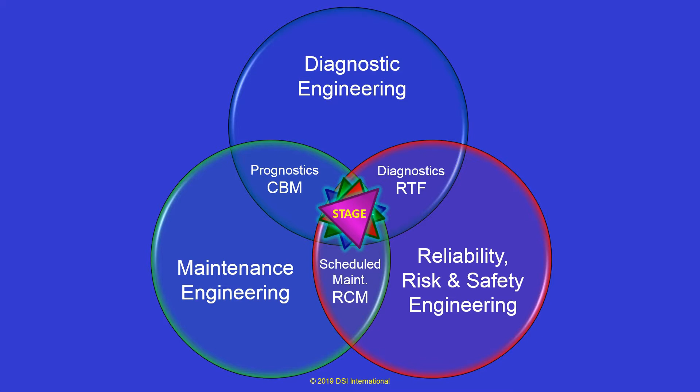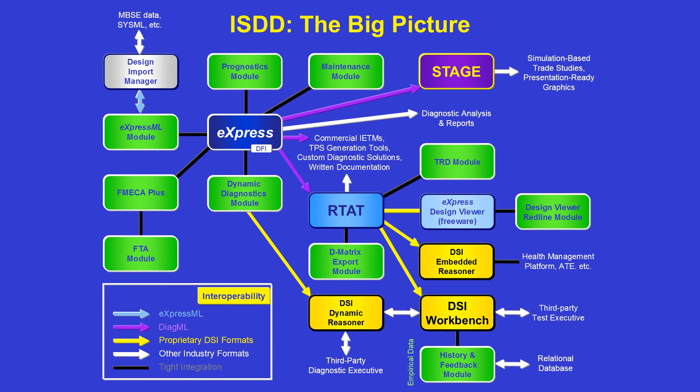At the core of the model-based diagnostics engineering is eXpress, which is not only interoperable within DSI's ISDD model-based tools, but also with data from any capable third-party reliability or MBSE tools. The eXpressML data import to eXpress is used to capture functional data structures from industry MBSE tools, but also avails an XML output for reuse in other high-end aspects of the MBSE environment as well.

MBSE tools do not typically contain comprehensive failure data or diagnostic information, as is essential when attempting to optimize and influence design decision-making. Contrarily, by leveraging eXpress, significantly more integral data is immediately integrated within a dynamic product lifecycle management, or PLM paradigm. In ensuring the integrity of the MBSA, the diagnostic interdependencies shall provide the means to cross-validate any interdisciplinary design assessment products. With this knowledge base, the test coverage for any BIT can be validated.

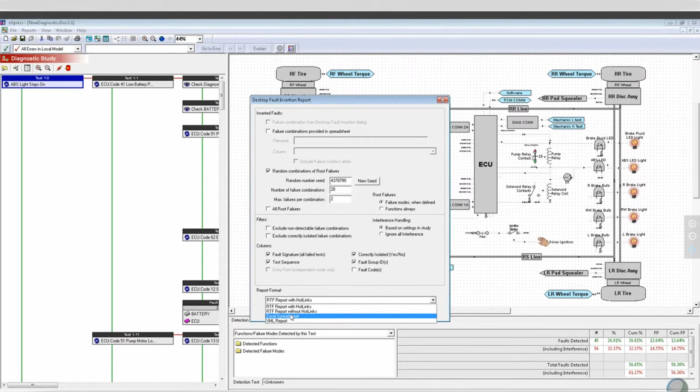In eXpress, one way to validate your diagnostics is to run the fault insertion report, which can show how the diagnostics isolates random combinations of failures. Let's do 20 combinations of up to 2 failures at a time. We'll include the fault signature and test sequence for each failure combination and generate the report to a spreadsheet. For each failure combination, the report lists the test that would fail and the test used by the diagnostics.

The auto-generation of testability assessments is a core competency of eXpress by delivering a rich and unmatched set of documentation in support of any complex design. eXpress is able to auto-generate preliminary failure modes and failure effects for any design. When more specific data is available, it is imported or merged into the model and fully propagated throughout the design.

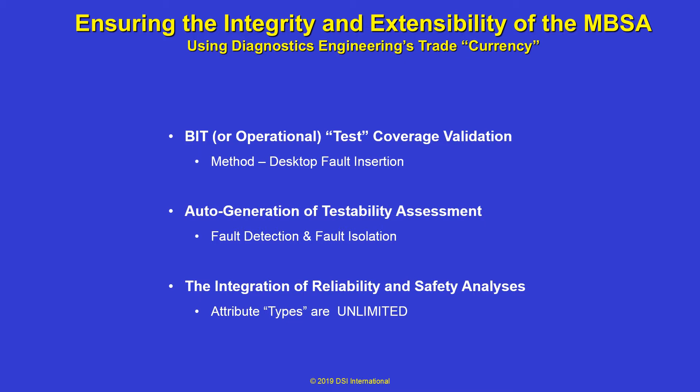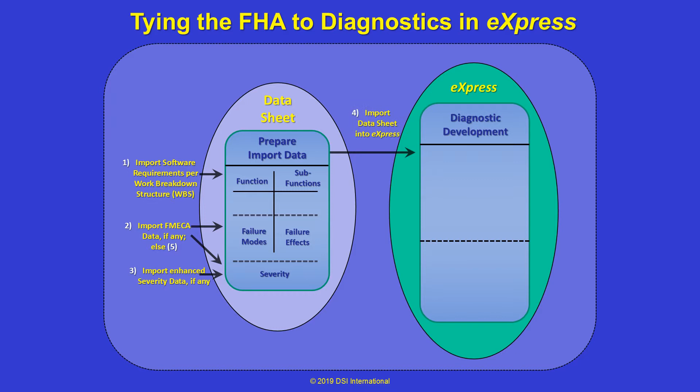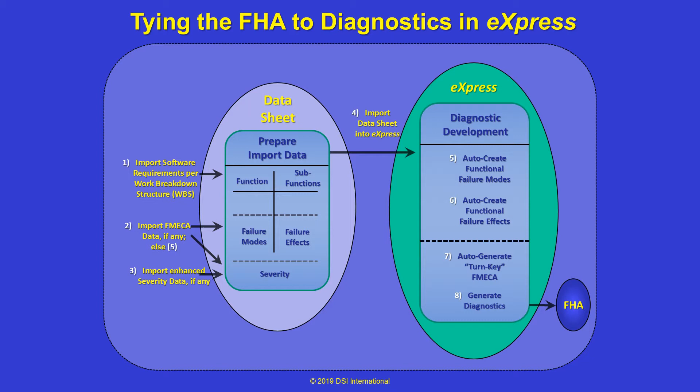Since eXpress inherently propagates root failure modes, failure effects, and relevant component property attributes throughout the entire design hierarchy, the preliminary functional hazard analysis can be auto-generated as an output product and/or described in a form that is traceable and mapped to the WBS. eXpress is able to automatically generate the traditional, standard FMEA or FMECAs while allowing full customization.

Additionally, eXpress enables the FMECA to describe such diagnostic details about each component as failure detected, number of root failure modes in each fault group, and the size and constituency of that fault group. It can also describe if the failure is uniquely isolated, being identified as FUI, which is key to considering any root failure causes. Not fully discovering the impact of FUI will have a negative impact on the operational value realized from any MBSA.

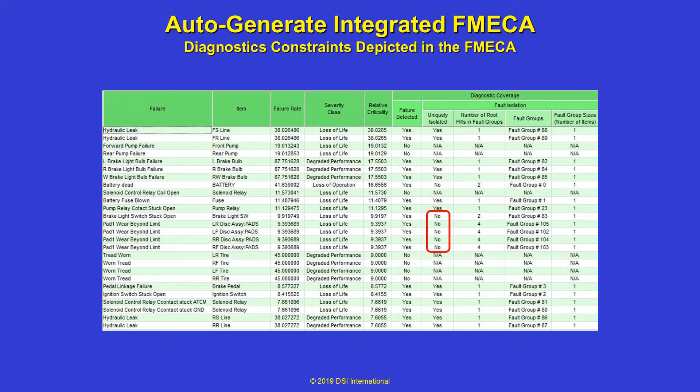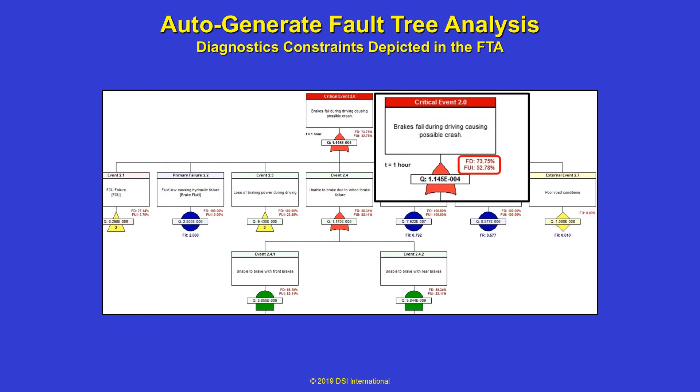The Express Fault Tree Analysis, FTA, is produced as an output from the captured diagnostic design in Express. Unique to the Express FTA, it will identify the probabilities of detecting a failure at any node of the FTA and the percentage of that failure that can be uniquely isolated, or FUI. This is key to identifying the root cause to a specific failure mode at any node in the FTA, integral to a high-end MBSA process. The inability to discern the specific root cause is a heavy contributor to false alarms and operational aborts.

The simultaneous auto-generation of Express Diagnostics informed FMECA and the interdependent Express FTA can be performed at any point during design development. Concurrently, automated cut set reports for any FMECA FTA generated in Express can also be reflective in a failure mitigation report to discover unmitigated single-point failures.

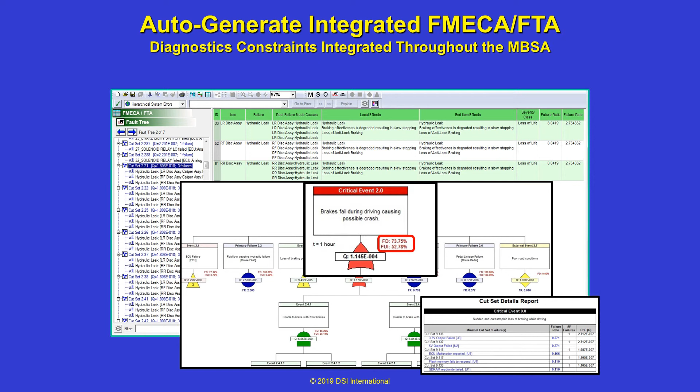As these companion assessment products are generated as codependent outputs from any model within Express, any variation, change, or update to the Express model during the development process can be immediately integrated with the corresponding MBSA and included in ensuing trade study analyses.

To discover the strengths and weaknesses of the MBSA as it corresponds to the operational environment, the data can be exported to an operational support simulation whereby any failures can be simulated during any mode or operational state of the operational asset. The simulation of failures will determine if the critical failure is detectable or isolated as declared in the FMECA or FTA, but at the operational systems level.

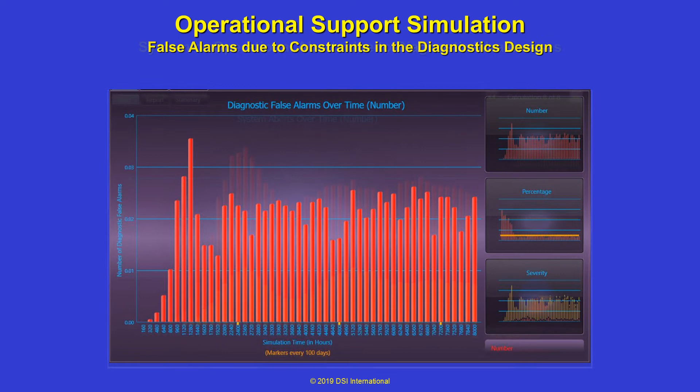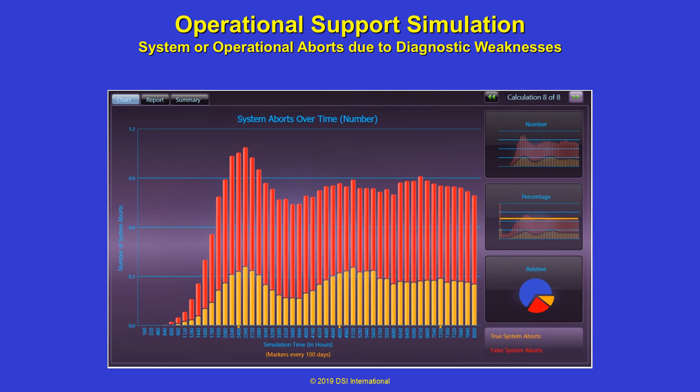The STAGE operational support simulation will determine the impact of the occurrence of any failures during any specified sustainment lifetime. Unique to this simulation is that it allows the assessing of any mixture of maintenance paradigms, such as run to failure, preventative, condition-based, and predictive, to analyze operational trades, benefits, and costs in over 100 graphs.

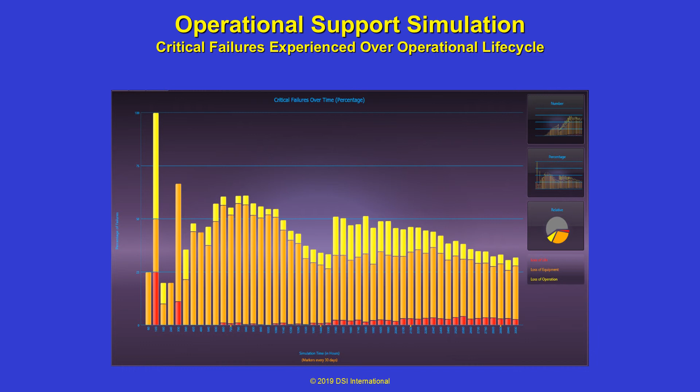The STAGE simulation is cognizant of several things. 1. The test coverage of each sensor, BIT, and all diagnostic fault group constituency. 2. All failures that are and are not detectable at any time during the operational diagnostic interrogation. 3. Includes all failure rate, failure modes data, and computes failure propagation knowledge throughout the system. And 4. Considers the impact of how the system is maintained and how it will fail in the future.

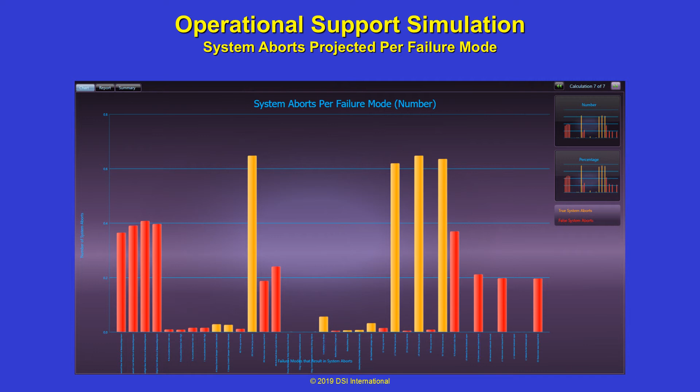The MBSA must consider the operational effectiveness of very low-level physics of failure analyses for safety and risk mitigation objectives. This area of PHM can become extravagant or ineffective if not strictly worked within diagnostics engineering as a means to provide operational and maintainability effectiveness assessments during design development.

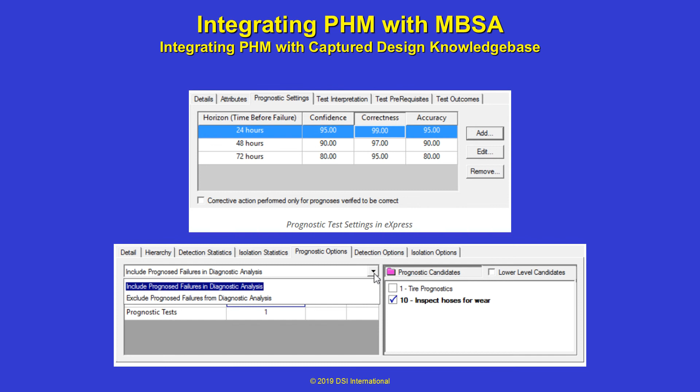The first step is to determine the best candidates for health monitoring or health management at the operational asset level. With this approach, investment in the development of advanced sensor technologies is based upon the diagnostic effectiveness and value of the proposed BIT for any PHM application. Maximizing the utility of MBSA detail will combine to provide PHM candidates that can be objectively selected on the basis of safety, risk mitigation, and operational value, rather than solely on the size of the corresponding PHM budget.

Since this capability determines the test coverage of any proposed or deployed sensors or BIT and is fully cognizant of the propagations of any failure to the lowest root cause, it is able to generate turnkey outputs of the FTA that considers PHM in the MBSA.

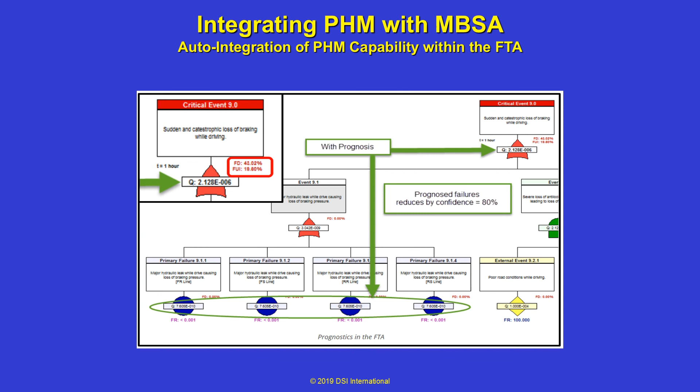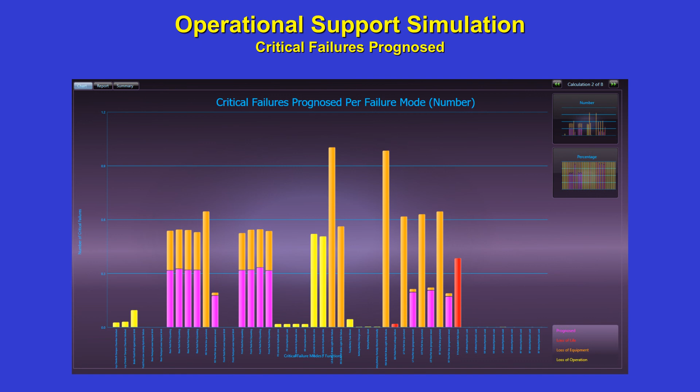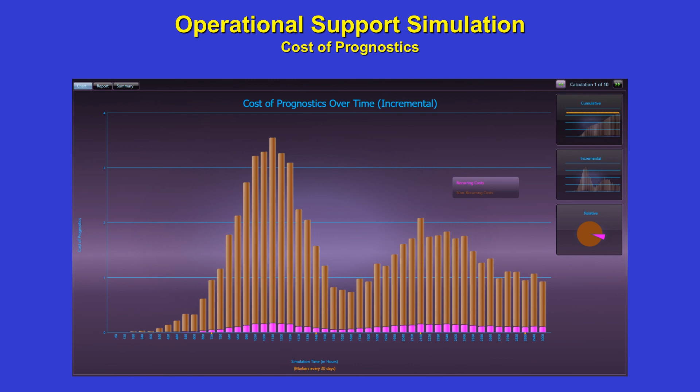The prerequisite for the assessing of the expected operational value of PHM-informed MBSA is the use of diagnostic engineering as the currency to 1. Select prognostic candidates. 2. Discover the impact on risk mitigation in the FTA. 3. Balance PHM with any other mix of maintenance requirement strategies, RTF, RCM, CBM, PDM, and non-recurring costing data to achieve a myriad of sustainment lifecycle requirements. 4. Transition optimized MBSA to the operational environment.

The ambitions of any high-end MBSA will ultimately be constrained by the diagnostic integrity of the operational asset and its effectiveness to transition the quality of the resulting design to the operational environment. To this end goal, this video has identified a number of the more unacquainted but integral pieces in assuring that the integration of MBSA into the MBSE environment is a seamless and effective process.